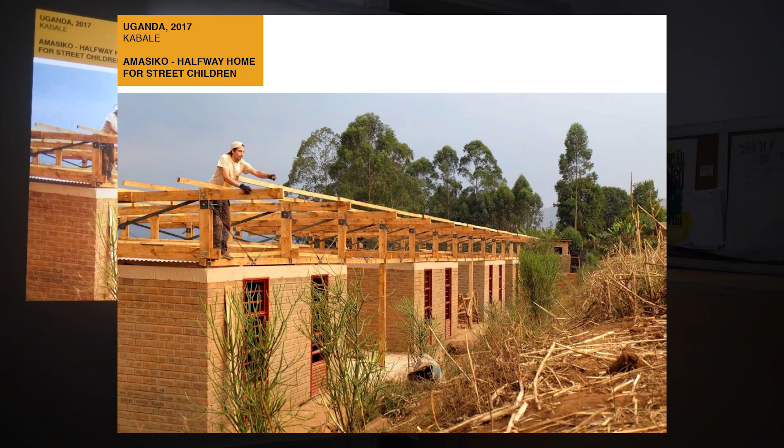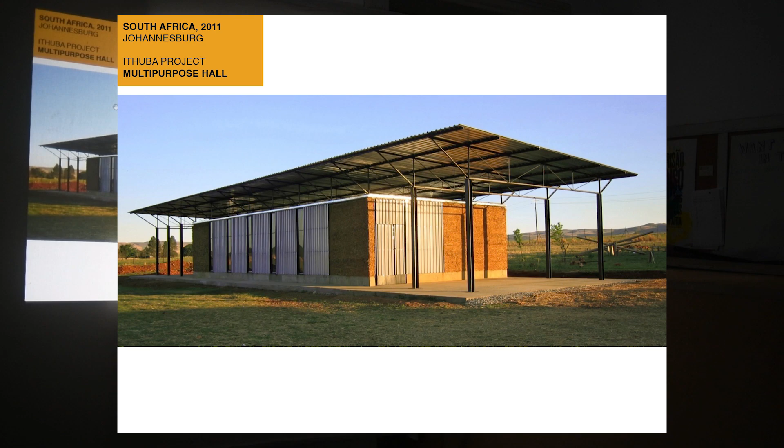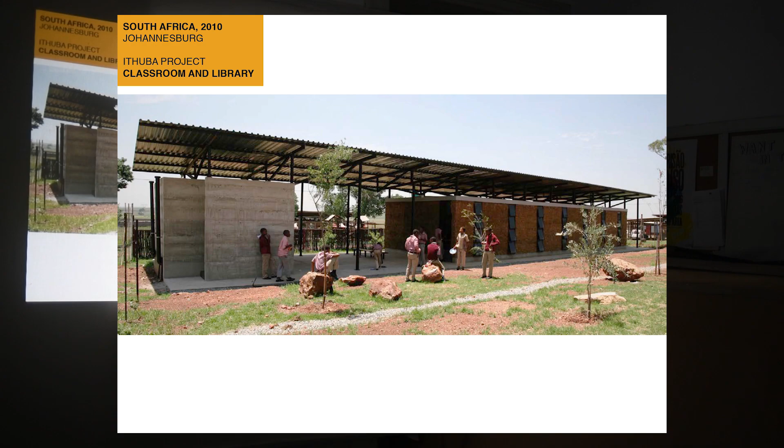It all really started in South Africa, when we joined this huge network of European schools building primary social infrastructure, like schools, kindergartens, and healthcare facilities. This was the multi-purpose hall in a large complex of school buildings, kind of a college. And the first one was a classroom and a library.

I will not focus so much on why we do it, but I think it's very important to think about the fact that we do it for society, and that every member of this society, wherever it is in the world, has the right to dwell well, to have access to housing, education, and healthcare facilities.

It's maybe also important to say that I'm coming from Yugoslavia. I grew up there, in socialism, and for us the education system remained the same now in Slovenia. It's a good legacy of very socially based policies in Yugoslavia, where education was free for everyone. I'm still part of this system, which is, I think, really good and still existing in Slovenia. Basically, primary, secondary, and university education is for free, accessible for everyone. So I really stand for the right to education for everyone.

So we decided, ten years ago, to contribute to the goal of what were first the millennium goals, and then the sustainable development goals. Our focus is universal primary education, so we decided to join this network of building schools in less privileged countries.

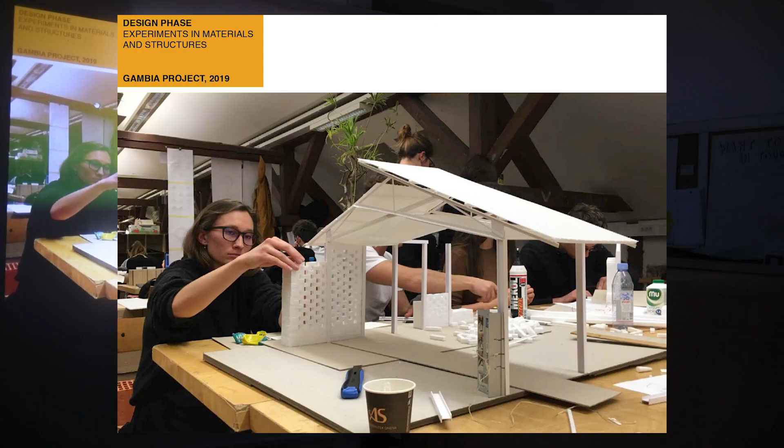Typical project phases: because we can't go first to the site, usually a small team goes to the site wherever we build, and comes back with a report from the field, the first report. We acknowledge how people build there, local techniques, local materials, and so on. Then with the rest of students, we develop projects over one or two semesters, depending on the difficulty. So we do a lot of design work, but also a lot of practical work.

Whenever we find out which materials and techniques should be used, we try to experiment also in Ljubljana. For instance, this is a prototype of a structural frame which was used in Gambia when building a canopy in the children's playground. We first tested it, and it's not only about the test, but also about getting knowledge that should be used on the site later.

For fundraising, we usually design small furniture and design objects, and sell them in auctions, or through sponsorships. We organize events like auctions and collect money. For many projects, we sell either furniture or small design objects. Also, Ljubljana has a nice open kitchen on Fridays where a lot of people meet, and in accordance with our municipality, we get a stand and make pancakes to collect money for projects.

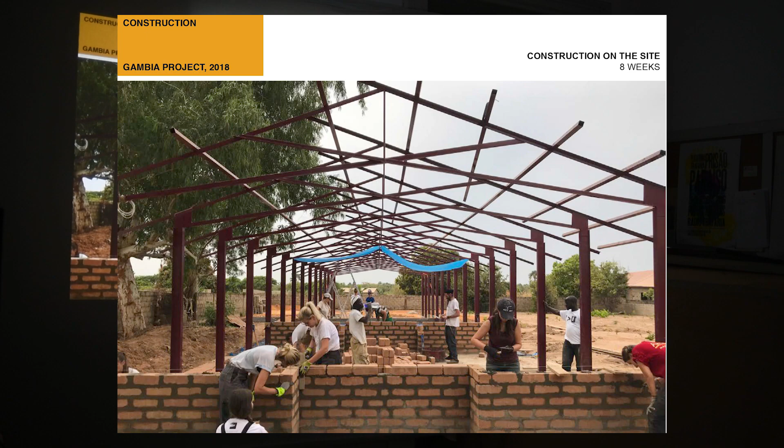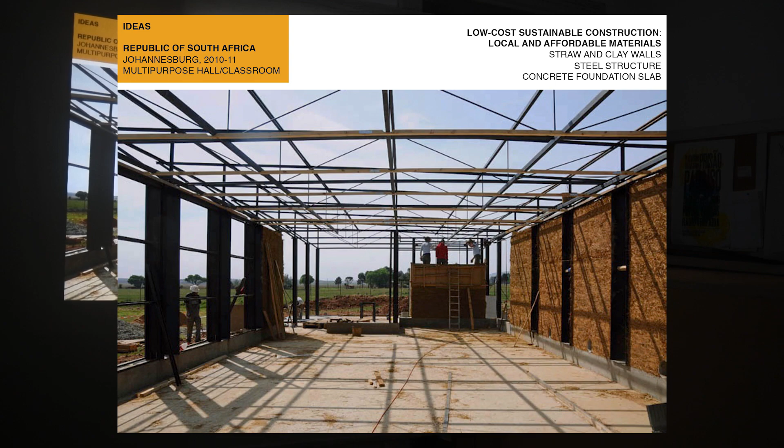As I said, we try to use local techniques, maybe in a modernized way. So, going back a little bit to South Africa, we were using the technique of making walls with straw and clay. It's an old technique, but a little bit more developed, it's about making a mixture of straw and clay and then using ramming as a building technique.

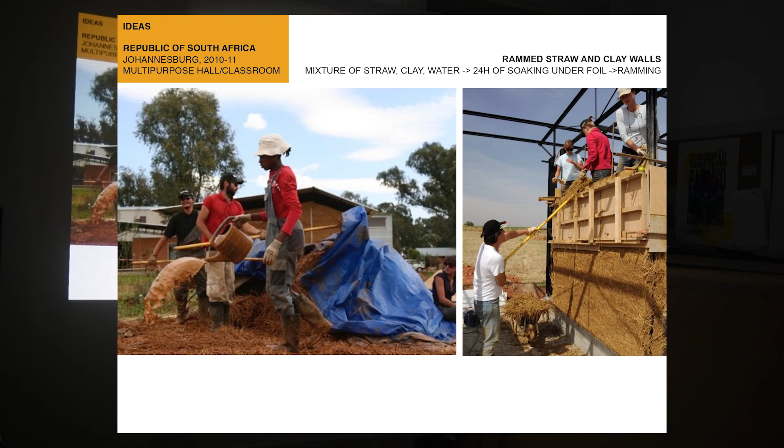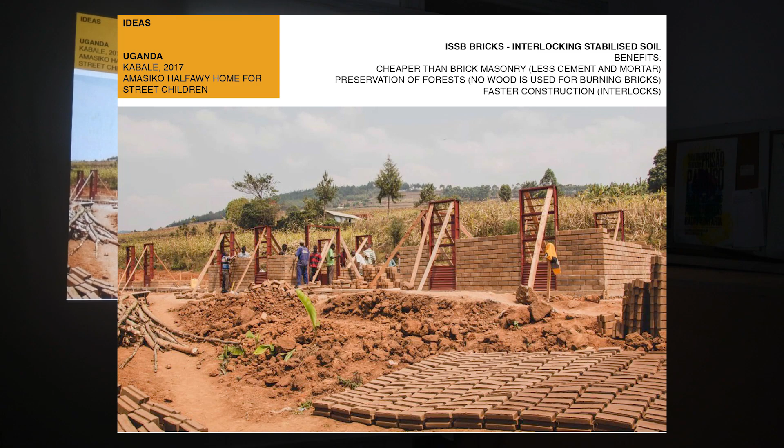In Uganda, we started to use another technique, which we also used later in Gambia. We realized that in Uganda people usually build with burnt clay bricks, just normal ones, but it's a very unsustainable way of construction because burning the bricks takes a lot of wood, so whole parts of forests are getting extinct. So we focused on the technique of earth compressed bricks.

We actually made bricks on site with the aid of this manual press. You can produce around 200 to 300 bricks per day. It's just a mixture of soil, some cement, and water—the mixture depends on the soil. We were also there a year before.

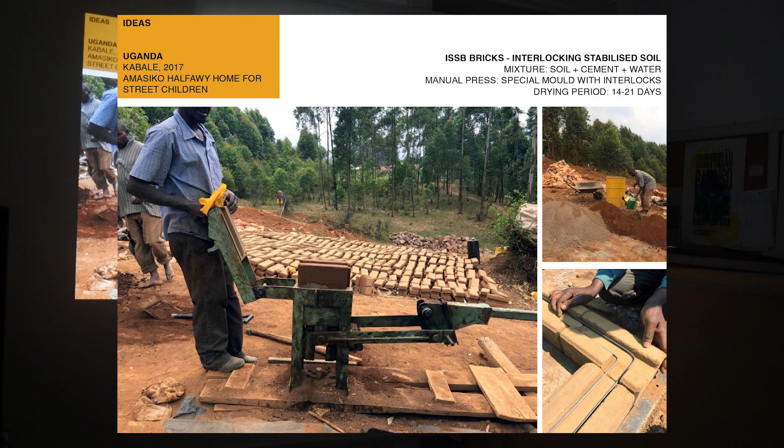How do you mix the elements? You excavate the soil, add about 1-2% cement depending on the soil quality, add some water, mix it, and put it into this mold. You see the cast of the press, then you press it, and it's very compact. You dry it for 2 to 3 weeks, and when it's dry it can be used for construction. With bricklaying, you use much less cement than with normal burnt bricks—that's also a benefit.

That's the building, how it looked then later.

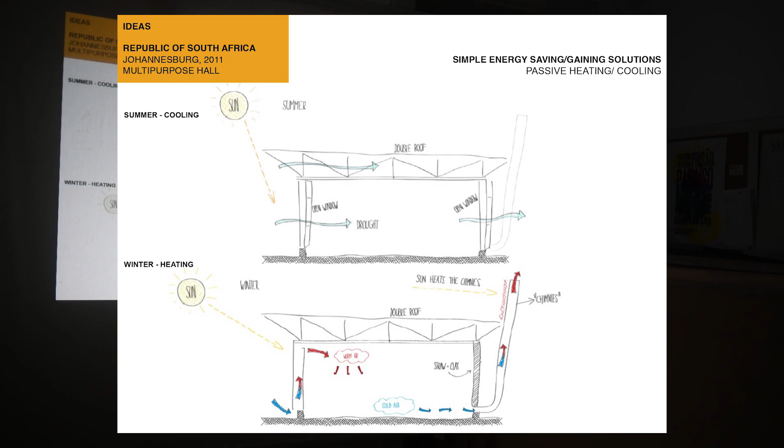Another thing we focus a lot on is good use of energy, controlling the temperature in the spaces. It depends on each country we work in—we analyze the climate characteristics, and according to this we develop a ventilation system. This is the ventilation system in South Africa, and you see these strange chimneys—they're supposed to suck the cold air out of the inner space.

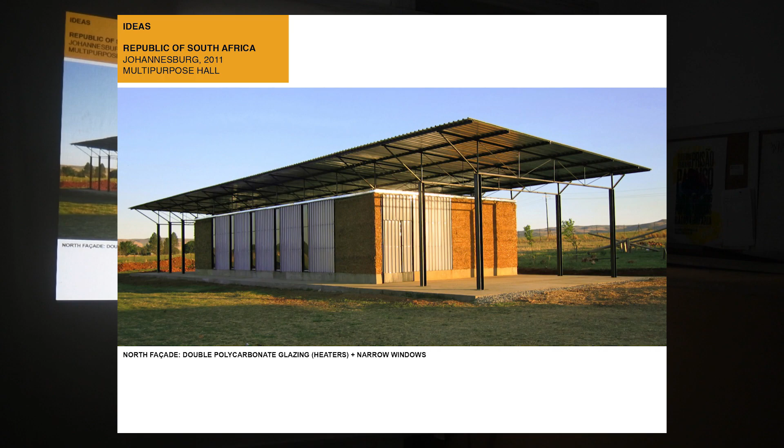And the other side of the building is actually designed to collect sun energy, because this glazing, you see, it's actually double glazing made out of double plastic, and the air heats in between. So it actually warms up the inside space.

It was a multi-purpose hall for kids. Now we will, with Nina together, since Nina was part of the team, quickly present how the construction worked in Gambia in the last project where we did a nursery school. Maybe it's interesting for you guys because we really focused on showing how we did it.

Gambia is the smallest continental country in Africa, a very tiny country with 50 kilometers of Western Atlantic coast, and it stretches inland along the river Gambia. We were working in Brufut, which is a continuation of conurbation on the western coast, going from Senegambia, which is a very touristic part of the Gambian Atlantic coast.

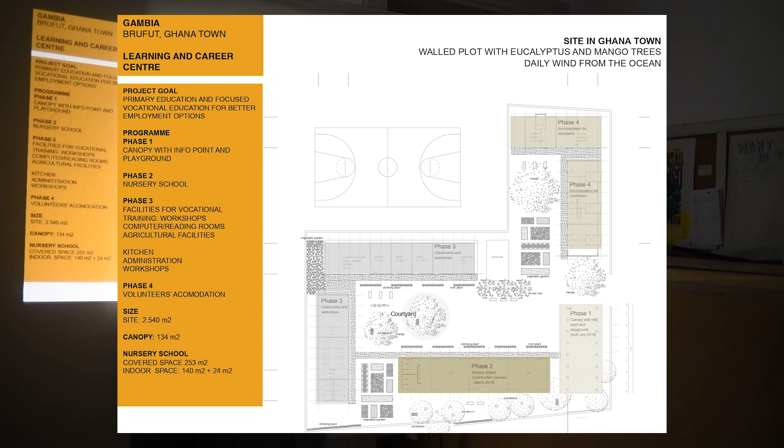That was the second phase, built this March, at the end of February and March. The other phases, phase 3, have 2 buildings with classrooms and administration and kitchen, and in the end, accommodation will be built by locals themselves. So it's not the idea that we're together all the time, but that from the techniques we develop, locals then continue to build on their own.

On the right you see the first phase, which was later used while we were building the nursery school as a kind of covered working space, but it's basically a covered playground for local kids.

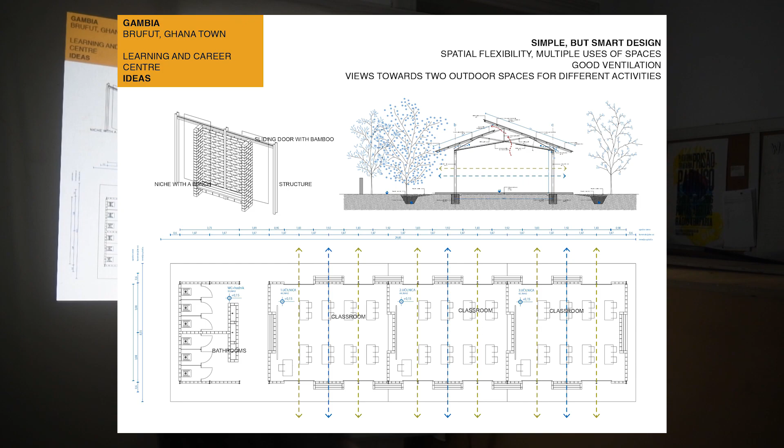However, the drawing is important, I would say, because I think architecture process also goes through a drawing, and thinking architecture also goes through a drawing. Of course, our students are required not only to do construction, but also to be able to provide construction plans. It's not only building, it's also being able to produce construction drawings. And what's really important, as Bernardo said, is how to make these drawings understandable for everyone.

Through drawing, not only computer drawing, there are many sketches which are also part of the process on the site, because every day, usually in the evening, mentors with students were redesigning the things we had, because on the site everything changes all the time. So you have to be able, through a drawing, to control the building process and the things that change, so that you are able to actually follow the changes.

If you check this cross section, our main idea was to design a building with classrooms that would allow for good climate. Gambia has very humid and warm summers, and there's a rainy season and dry season, but basically in dry season the temperature is lower, whereas in rainy season the temperatures are actually higher. But we wanted to allow for really good cross ventilation and allow the breeze from the Atlantic to go through the building.

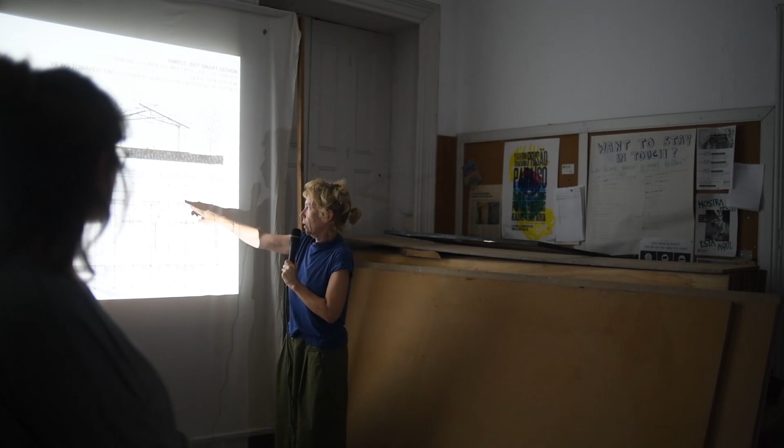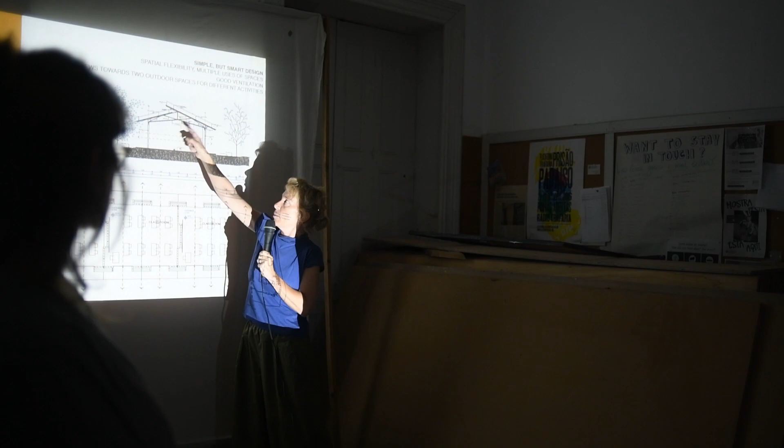You can see it here, and we wanted to achieve this good ventilation by designing the walls themselves as a kind of ventilation walls, and also thinking about the section, about how the air can actually go through the space between the primary roof and the secondary roof. We see the shape of the truss itself actually corresponds to the airflow. We will see that a little bit later.

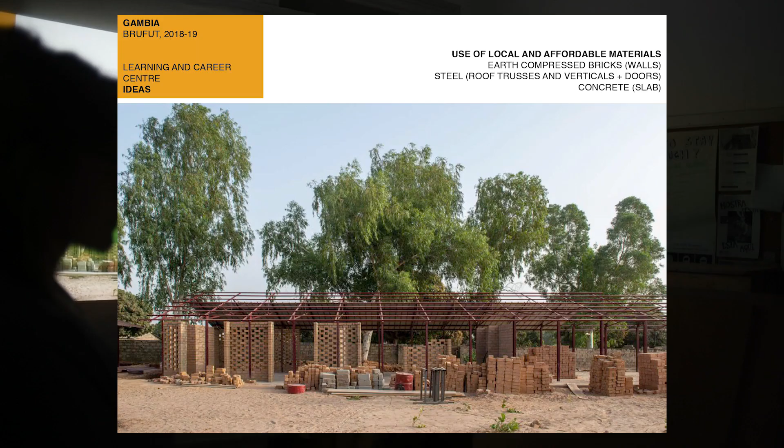We used the same approach but adapted to the soil we found on site in Gambia. We used earth compressed bricks. We decided to use this technique, which is maybe the future of more sustainable construction.

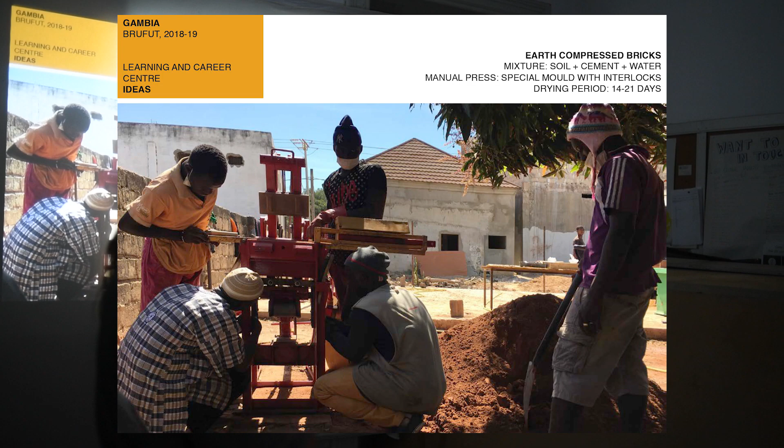This time we didn't do it on our own. We made a collaboration with a local firm which produces these earth compressed bricks, called Earthworks Construction, run by a man named Alpha. They produce earth compressed bricks in different sizes and shapes, so you can build a lot with them. We decided on one type, and used it to also make this kind of bricklace.

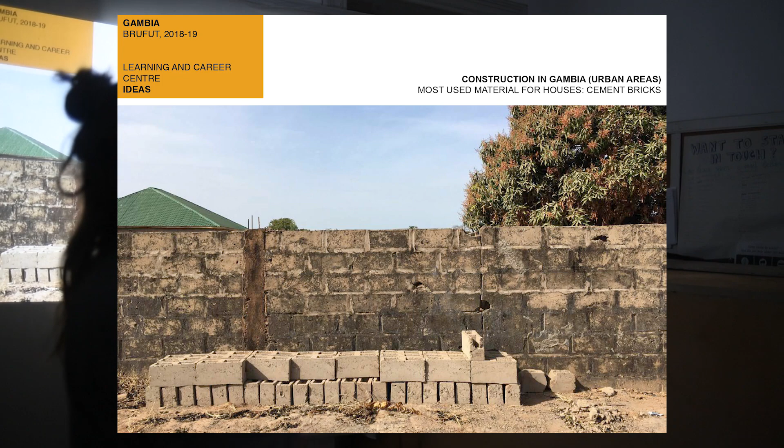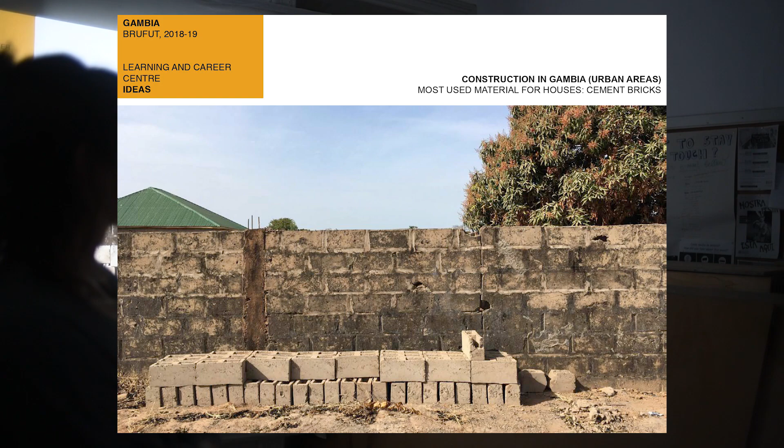Otherwise, the most common technique for construction, at least in urban areas, is cement brick, which you can see here. People make these cement bricks usually on their own, using a lot of cement and sand, because the soil here is rather sandy. But the problem is you use a lot of cement, which is rather expensive. And of course, concrete is, after water, the second most used substance in the world, and it causes a lot of environmental problems.

So we wanted to find a material that would be more sustainable in this way, and not only because of that — the price of the earth compressed bricks is also quite close in the end to the cement ones.

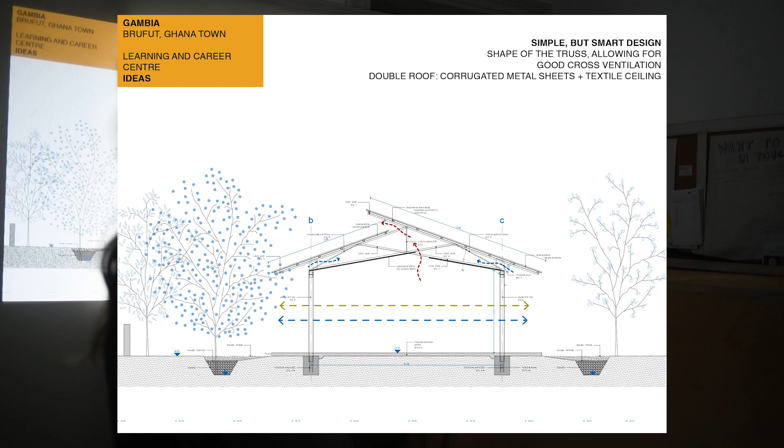Our basic structure frame is composed of very simple L profiles. There's a primary roof and a secondary roof, which is made of textile, and the air actually goes through this space and cools the spaces down a little bit. Also, the secondary roof has a hole for the hot air to go out, because hot air is lighter and moves up.

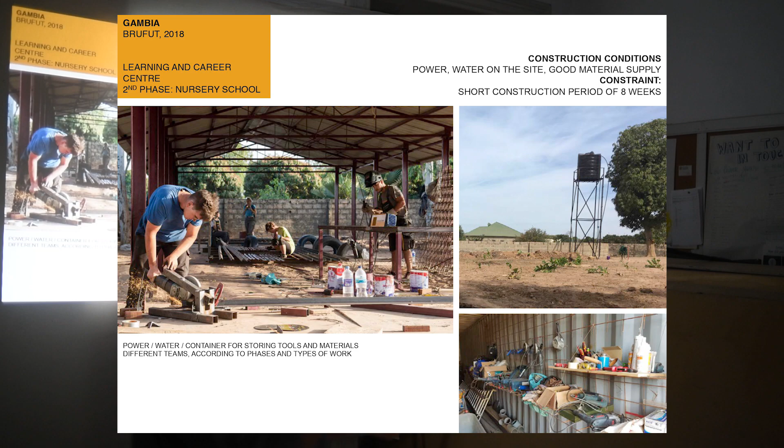So I joined the project. The whole construction lasted 8 weeks, and students were divided into 2 groups, then in the middle they were on site all together. I joined as one of the coordinators for 3 weeks. We divided the work into different groups depending on which process we were doing — a group for digging and leveling the earth, a group for metal work, and a group for sanding and painting.

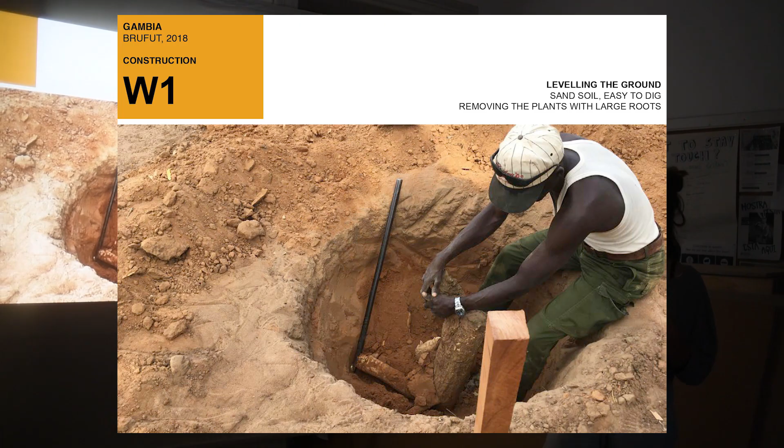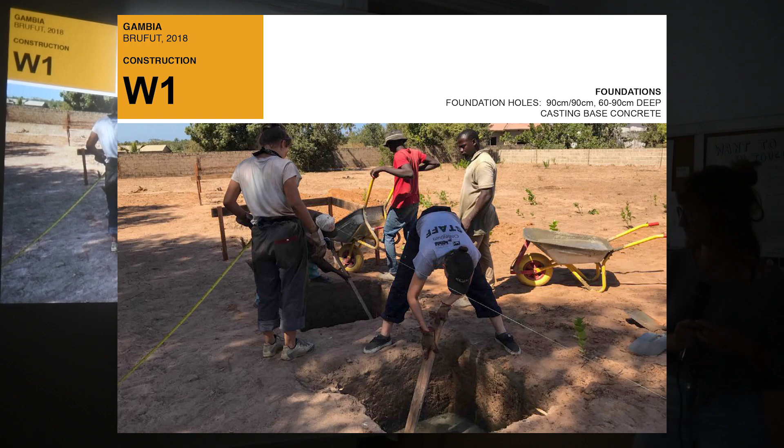The building consisted of 24 frames, each with a foundation on each side, so we had to dig them out. We used timber profiles and a water level, then put some base concrete to level them. You have to work with tools that are very basic and simple.

Our basic tools — every mason will show you these tools: a water level and water pipe level. It's a basic device for controlling the levels of any ground slab, foundation, or anything else. We use this simple device, a transparent tube with water, because water is always level on both sides — if you have two ends of the pipe, the water is always at the same level.

So we usually use this very simple thing for controlling every level of the building. Another important thing is just the spirit level, the plumb, and ropes. So you basically work without tools except for welding later. For setting up the building and everything, you work with very simple tools.

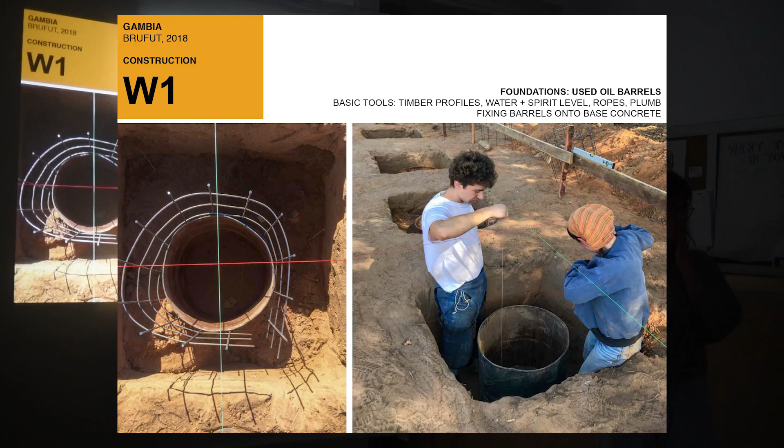Maybe here it's interesting that for the foundations we use barrels that we cut in half, like used oil barrels. We use them as casts for the concrete bases of the pillars.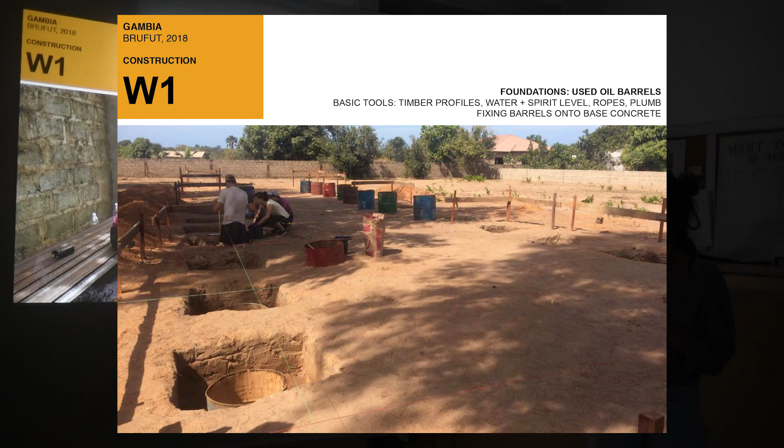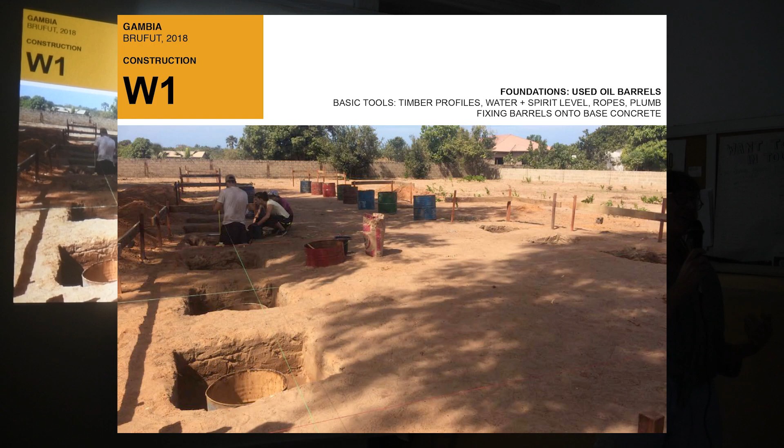And this is how we actually did the setting up of the building, and then marking for foundations. You see the ropes, and the intersection of ropes gives the exact positions for the structural frames. That also took time, to double check the length in both directions and the diagonal. At first it's not fitting, and the first two are perfect, but with every one more, the tolerance was also more acceptable.

But still, it's very important for you architects to know, if you use a steel structure and then bricklaying, if you make mistakes with the steel structure, the bricklaying doesn't work well, because you're out of level. So we have to be super precise despite very basic techniques.

You are precise like in millimeters? In millimeters. And it's very important to never forget this when you draw. The foundation concrete is a lean concrete, basically 5 to 10 centimeters that you pour into the foundation. And then the next day you check if in all the foundations the concrete is on the same level.

If it is not, you have either to take a little bit out or add a little bit. We made so many mistakes this year that it was a headache, but we managed it. It's important, because if one frame is higher than the other, you can't connect them, and bricklaying is about outer borders. So it's important to be precise.

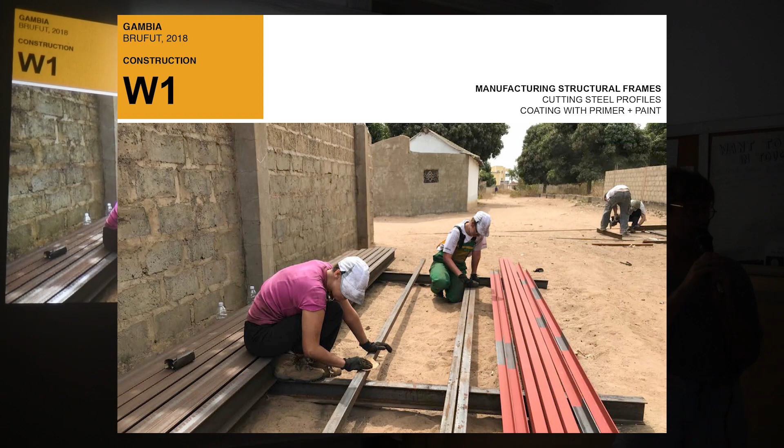And this is the preparation for secondary beams. So they put the primer and then the color, and they left where the beam is going to be welded, they left the joints without paint. So that was the welding team.

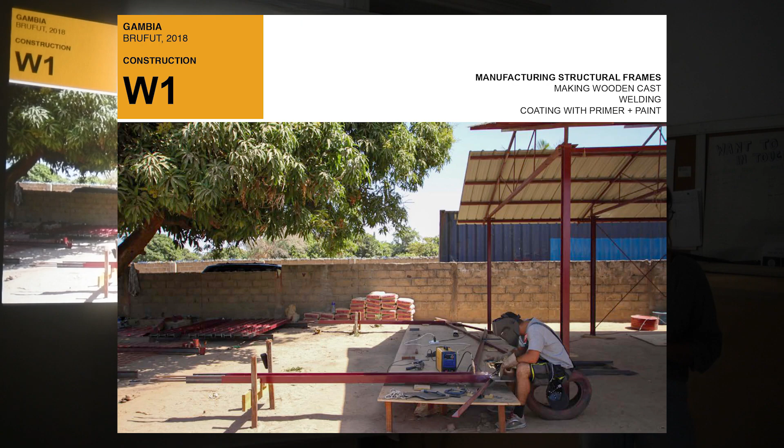We made a simple framework for the structure frames to be welded together. It was quite complicated because they were made of L frames, but we managed. You can see here our basic structure element, the frame, with IPE columns and trusses made of L profiles.

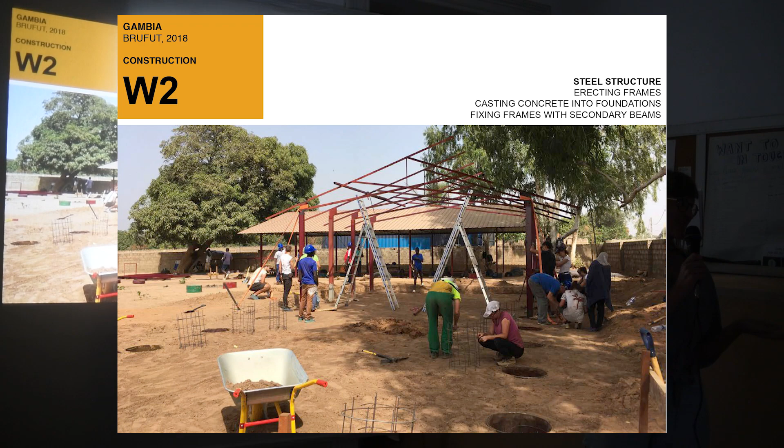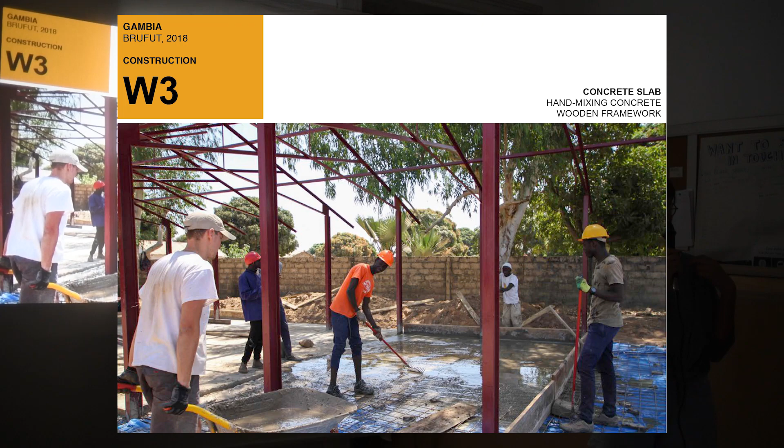So this is how we lifted them up, hand by hand. It was all handwork, with ropes, being really careful and precise again about the position. In the end we put 2 frames up each day, and it was a good rhythm: producing 2, painting 2, and putting up the 2 from the day before.

Because we knew we had a really short period of time, we structured the whole construction process so that many phases could go on simultaneously. So as soon as we had 8 frames up, we started to pour concrete for the base.

I guess you will ask me, why did you use concrete? The answer is there are many, many termites, and it's still the most sustainable way in terms of being long-lasting. Talk to Anna maybe, yeah okay.

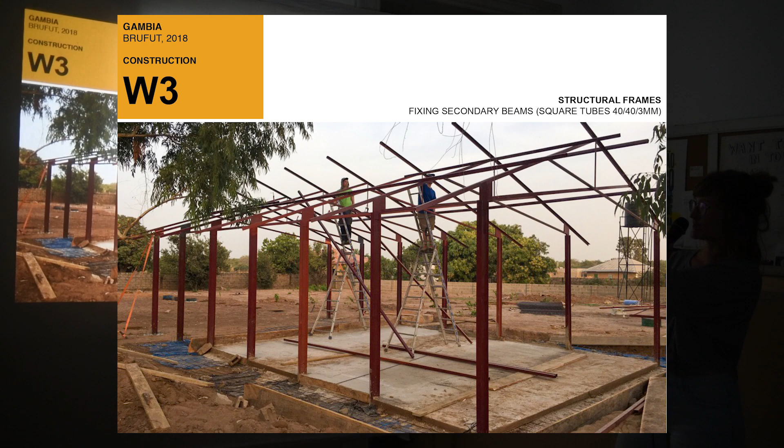So we actually put up the frames and simultaneously already poured concrete for the slab. We were working with wooden frames, and we always made every second frame, then the next day the ones in between. And then another group would start with the secondary metal beams.

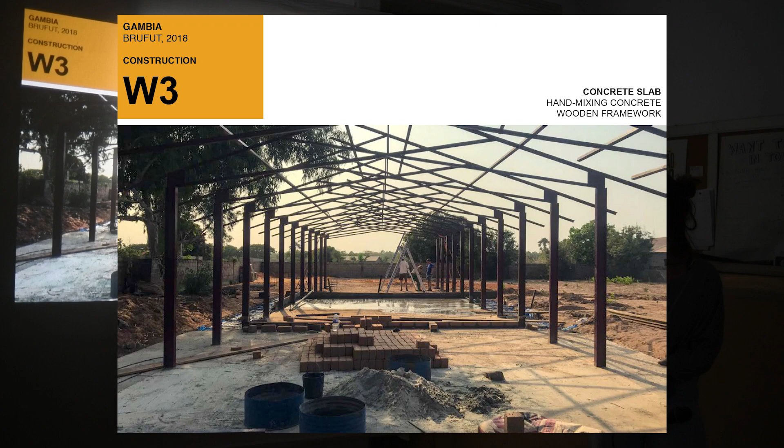You can see how it grew slowly, the structure, and the slab was not done till the end when we started to do the bricklaying. So slowly the building started to take shape.

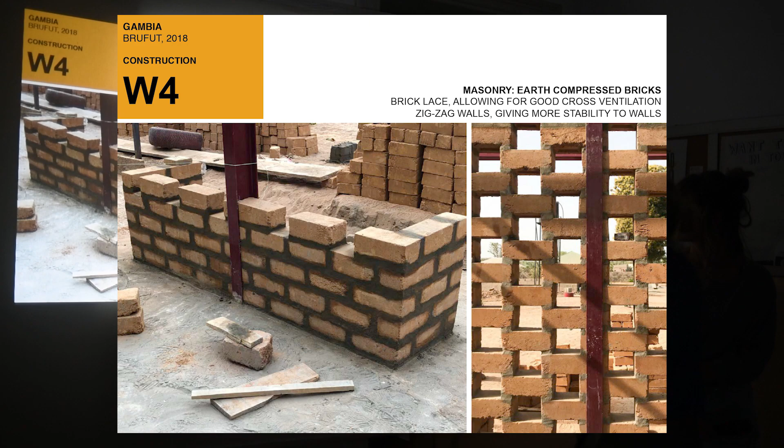We developed, not a technique exactly, but we decided to do what we call the bricklace, which allows for good ventilation. You can see how it is formed here. Another feature important for us was that we designed kind of alcoves, and this perpendicular way, this short piece we called a tail, allowed the structural stability of this part.

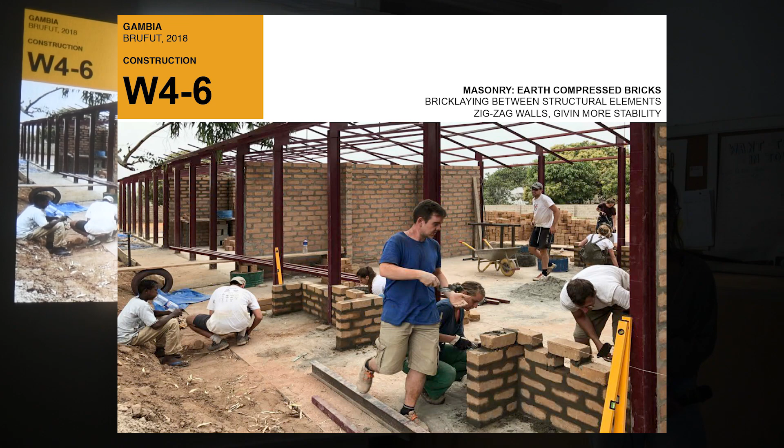Otherwise, you usually need something more structural at the end of the brick wall. So we decided to use this element as a structural element, and also as an element where later you will see we put benches inside.

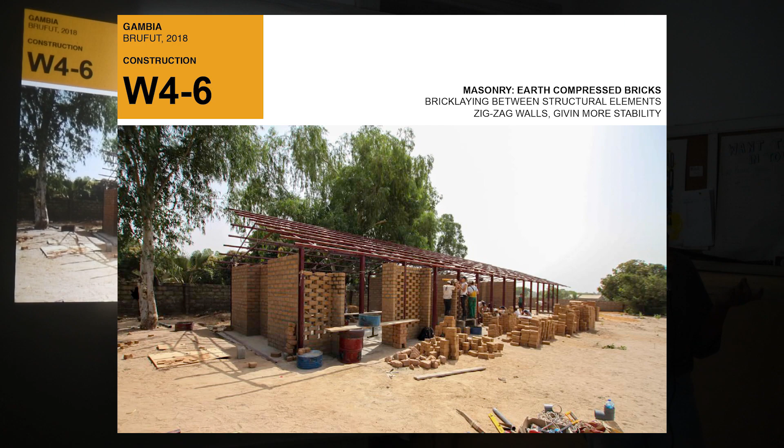We created niches for children to sit outside. And with this brick, it's interesting how it changed from what was drawn in advance. When we got the bricks, they were in different sizes than planned, not exactly matching brick laying, so we had to recalculate how many lines of bricks we were going to make. I think it was one less in the end.

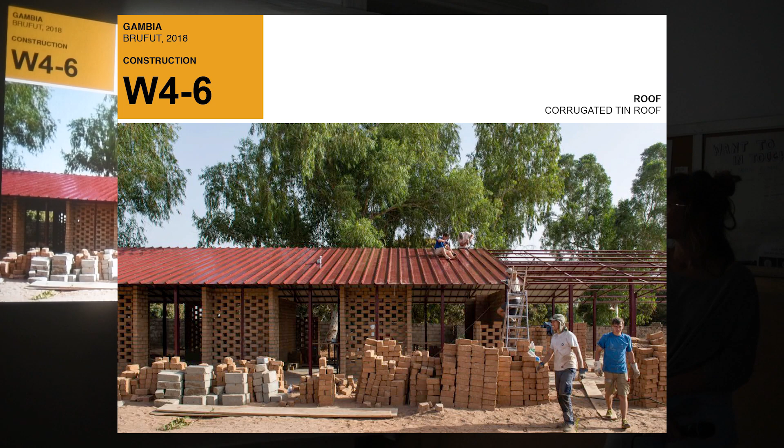So also, simultaneously, already when there were a couple of walls up, we started to put the roofing. There was no rain at the time, we were building in dry season, but the roof gave shadow for the works. It's a simple corrugated tin roof, which is usually used for these purposes.

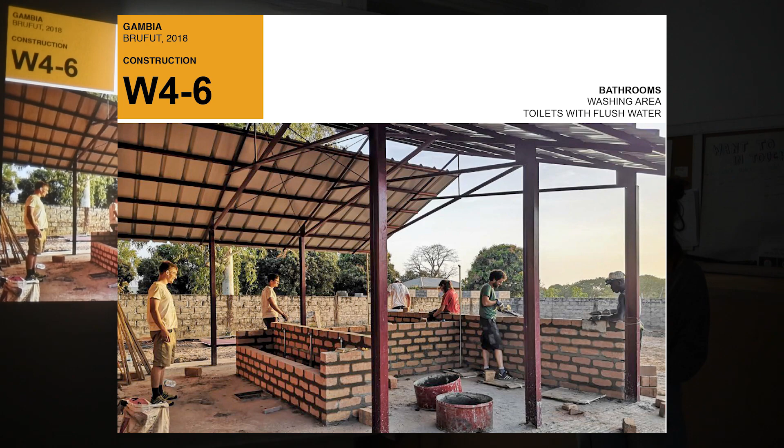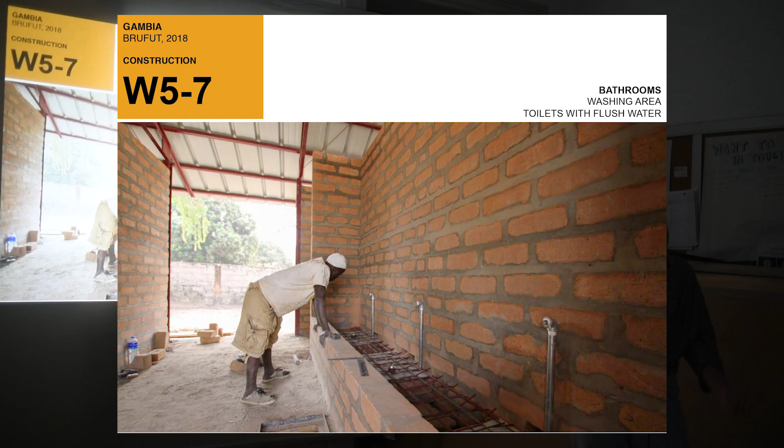These are bathrooms. We also did all the installation works, like you're doing here. And maybe this is Omar, he was really the best guy on the construction site, and he knew so much. That was like this exchange that Anja mentioned in the beginning. It was not that we came there to do something, but it was really also learning from the local team a lot. And they were like 3 to 6, it depended on the phase and the work.

We decided not to put any glazing, only to leave it open for the air, to leave the spaces open for good ventilation. So we developed metal frames, and you can see here, reinforcement mesh.

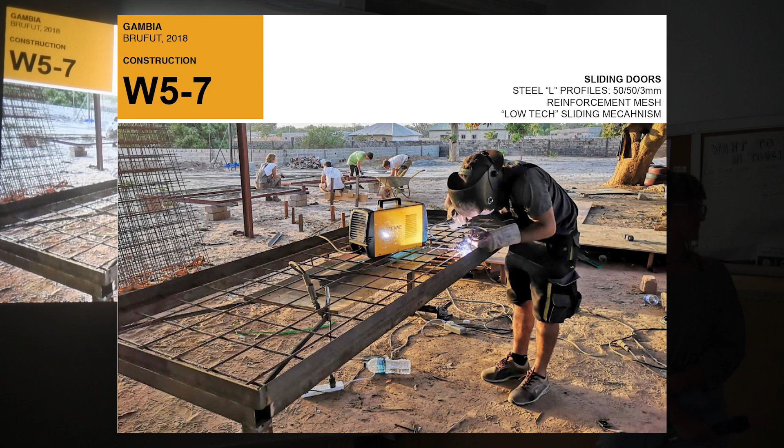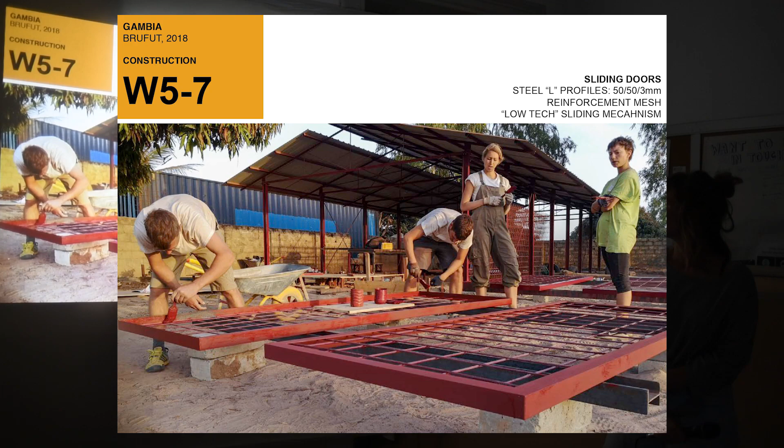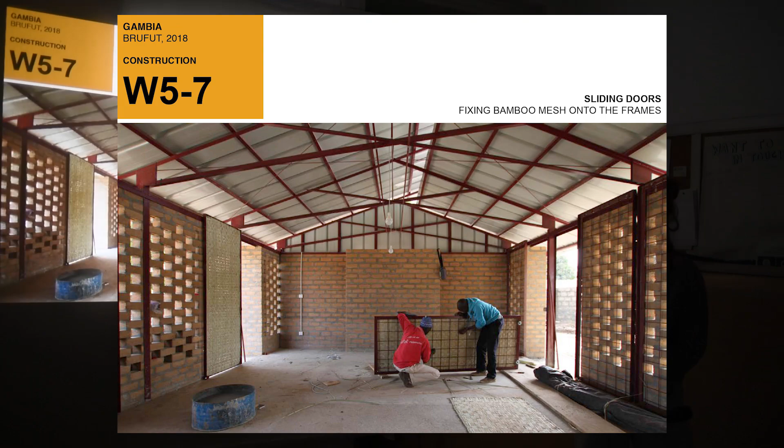We developed sliding doors covered with bamboo net that also allowed for good ventilation. So these were doors like this. With local weavers, we made bamboo nets, and we placed them later into these sliding doors. I think the novelty here were sliding doors, because not many people use them in Gambia. But we developed a really simple technique that works very well with small rollers, put on an L-shaped steel profile. So they roll perfectly, and the kids love it, they roll around like crazy now.

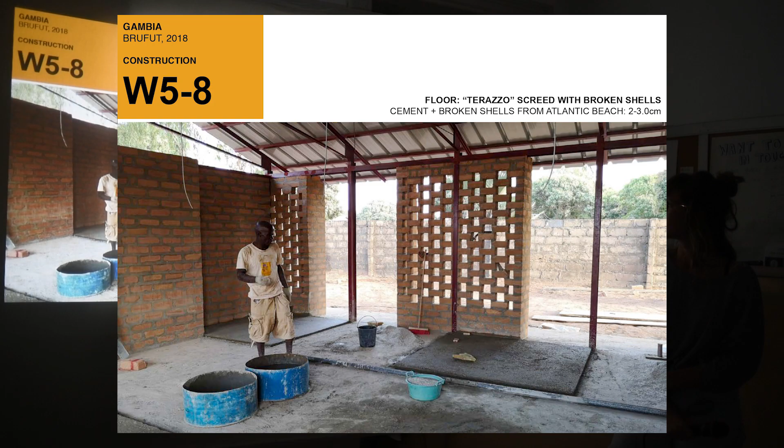These are also of Omar, who was working on this. We decided, as locals suggested, for the final flooring to use a mixture of cement and broken shells. It's something they use a lot there, a kind of what we would call in Europe terrazzo. In Europe you would use stones, but they use broken shells. And that's really a masterwork of Omar and the other guys who did this final thin layer of 3 centimeters of floor.

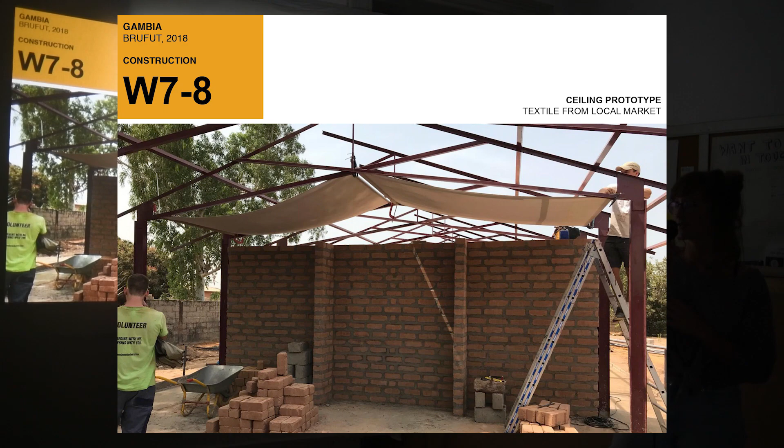It's really super nice. And that's the secondary roof. When we arrived there, we were still looking for the solution, which material could we use. We found this textile from a local, really big market in the city of Serekunda. We agreed with the guy, he had like 100 meters of it, and he delivered it to us.

And this, you will see later, the toilet walls. This was really spontaneous, because kids were always running around us, since it was so interesting for them that we were there and working. Some students allowed them to paint on the boards that were later used as doors, and it became a really nice element.

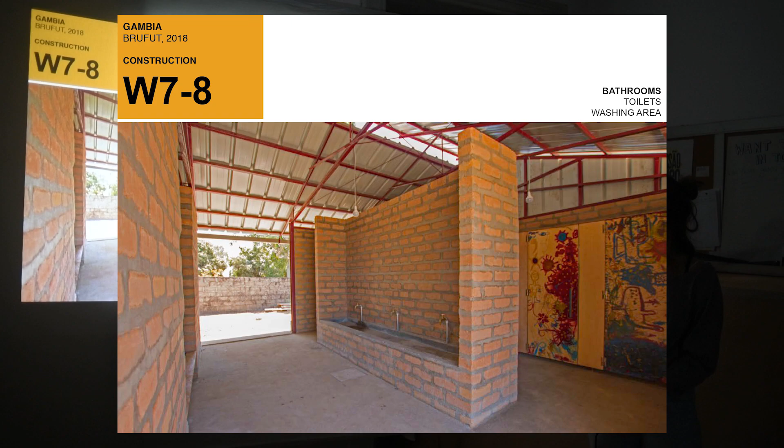So it's usually like this, kids collaborate with us. They love being there, and of course it's their space, so it's for them, and they designed this for us.

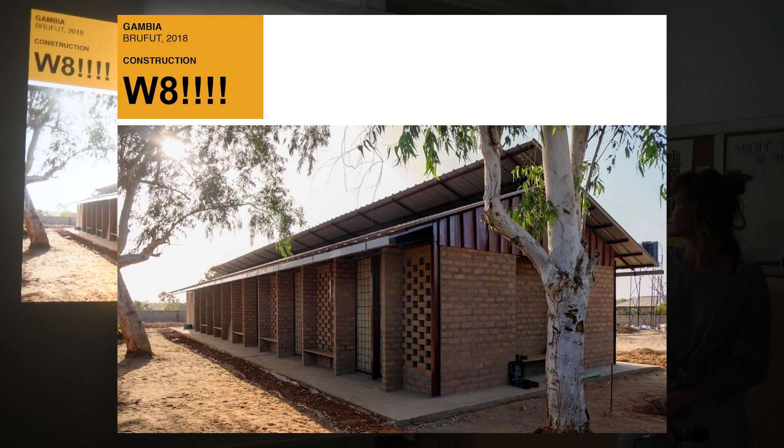This is week 8 of finished building, and you can see these niches that were used for benches, which turn towards the big courtyard space. I didn't mention that the local way of construction is usually to build houses around a central courtyard, which usually has a mango tree. Here, 2 mango trees are already there, and another one we planted. So this is both sides of the building.

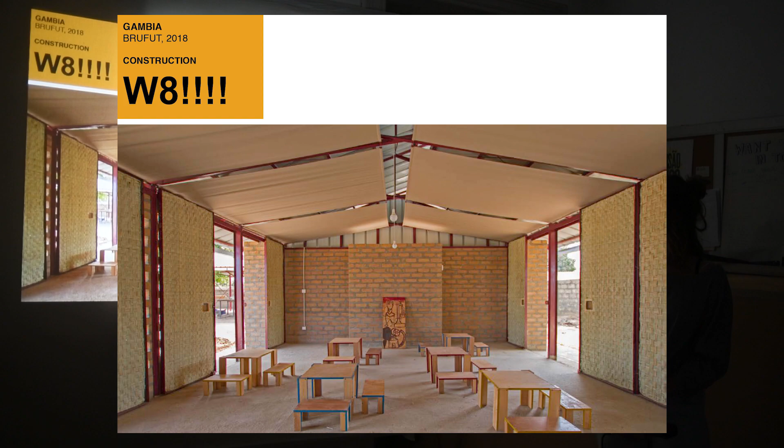We really wanted the air and the views to pass in this cross direction. So the children, when in the classroom, can basically see to their small park with eucalyptus trees where their playground should be, but they can also see to the right to the big courtyard. So it's that kind of a double-sided building. Yeah, this is it.

Questions? What preparation do you do with the students before you go to the site? Is there quite a lot of training back in Ljubljana, or is it very much you learn on the job?

Unfortunately, it's not enough training, I would say, because our school, we try to do this design-build project, but we don't have a big workshop at the school. So we organize different workshops elsewhere around the school. The truss that you saw that we tested, it was actually done on the site, at the school. But basically all the other things we have to organize. But we don't do only this sort of project, and we don't do it only in Africa.

We also work in Ljubljana. So students, for instance, were working for Slovenian philanthropy for their house. So we were also practicing there. But it's different generations and different knowledge.

This time the team was super great. We had like 2 or 3, or 4 guys who really knew how to build everything. It was super, it was amazing also for me as a mentor. I just admire them. They knew how to do the bricklaying, they knew how to do the welding. So it was easy to collaborate with locals, and it was really easy to put things up.